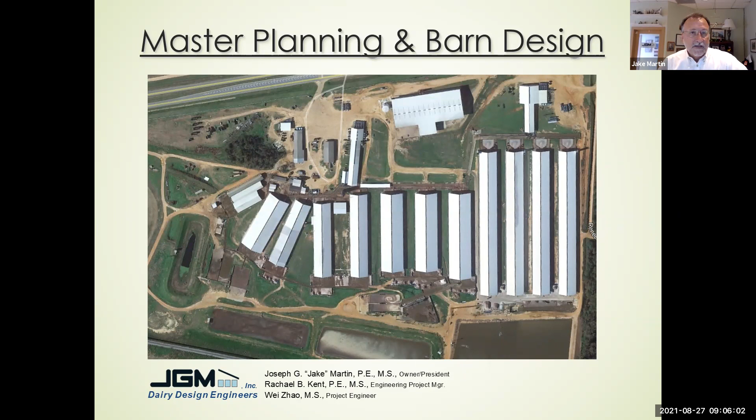What I'd like to do is go through some of the stuff on master planning and total design on these facilities, similar to what Dehne and I worked on for his farm, and then we'll get into some of the barn particulars. We're a little short on time, so I'm going to have to run pretty fast. So if I'm talking too fast and talking like a yank, just tell me to slow down, and I'll do that.

I have some initial thoughts I'd like to share with you, and the guys who know me have heard all this before. My main recommendation is to go out and visit as many successful dairy farms as you can, and if you can't do it locally, go someplace else. I know that COVID's been a pain in the butt, but get out there and visit farms. When Dehne was doing his, he didn't have as many opportunities because there weren't as many farms. Now that he's up and Jay Climo's up and a lot of other guys are up, there are more things for you guys to see out there. So just go out and visit before you decide to do anything.

As we go through these barns, one of the main things we look at is cow comfort. Gordy Jones, a buddy of mine, he travels all over the world as well. And his big thing is milk is absence of stress. We're trying to bring animals into buildings, trying to take the stress away from them, from cooling and from comfort and from shade, and just trying to get them to be happy campers to do what they need to do.

Putting animals in barns, which is what we're going to be talking about, is a different management philosophy, obviously, from what you're doing right now. If you don't agree with this management philosophy, don't even bother. This is a different animal from what you guys are working with right now.

My saying over the years has been, I've seen good facilities fail and I've seen bad ones succeed. Good management, proper management is what it really takes to make one of these things happen. You can spend as much money as you want to on a farm, but if you can't manage it right, it's still going to fail.

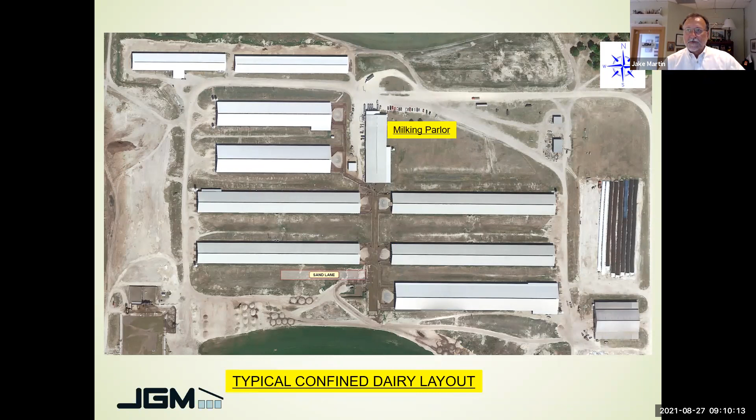Before I get into the Australian models that we've been looking at, I just wanted to take a quick look at this typical barn, this one here in Florida that we did in the last few years. This is a 3,200 cow dairy. This is a milking parlor. These are housing barns for milking cows. This special needs barn with dry cows and maternities and things like that. Older heifers, bred heifers, weaned calves and baby calves.

3,200 cows, 3,000 young stock. You get 7,000 animals when you include dries on this farm, and they're all concentrated in this one little place right here. This is what this guy wanted. This is how he wanted to manage his dairy. In addition to that, we got a feed center, which goes off the chart here. And we got a manure system, which goes off the slide here. But for the farm itself, this is most of the farm other than the property that they have for growing forages.

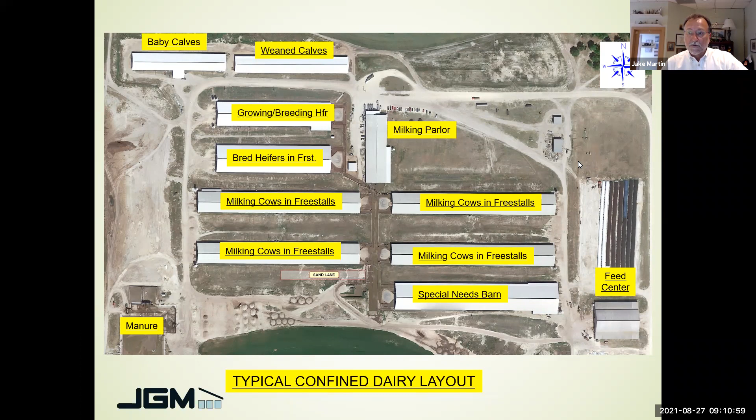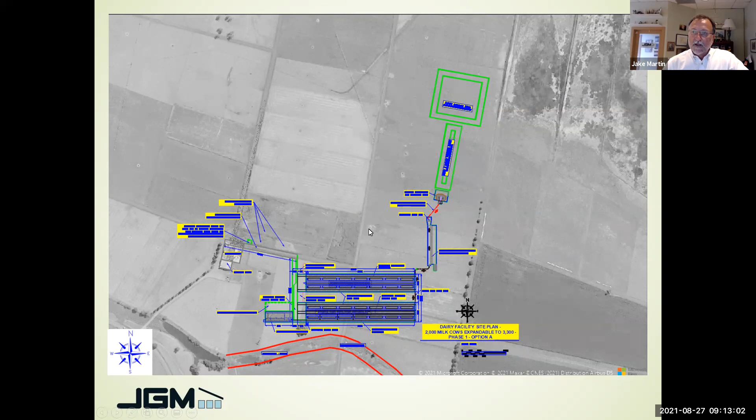As we get further into this and we start saying, okay, this land seems to work, the wind seems to be right, the slopes seem to be right, we can kind of work around these things. How do we phase it later on? He's got 2,000 cows now. This houses 2,000 cows, so he's done, right? He wants to make sure that if 6 months from now or 6 years from now he decides to go further, then we can do that, and he hasn't taken up space where barns would be. So the red is phase 2, and this purple here is phase 3.

And so you're going up to 3,000 milking cows, but in addition, you've got all dry cows. So you've got 1, 2, 3, 4, 5, 6 groups of milking cows here, 6 at 500, you get 3,000 cows, plus all your dry stock, close-up heifers, things like that. A new dairy here at some point in time when this one's out. Phase 1 is the first 2 barns. Phase 2 would be this first freestall, and at that point he's maxed out the existing dairy. And then phase 3, he's got this last barn. Same thing with the manure system that you can continue to add to.

So as you go through it, we've got a plan for the future on this farm. This might take 3 years to come to fruition. It might take 10. But we know where everything is going to be, and we've already figured out where things need to be.

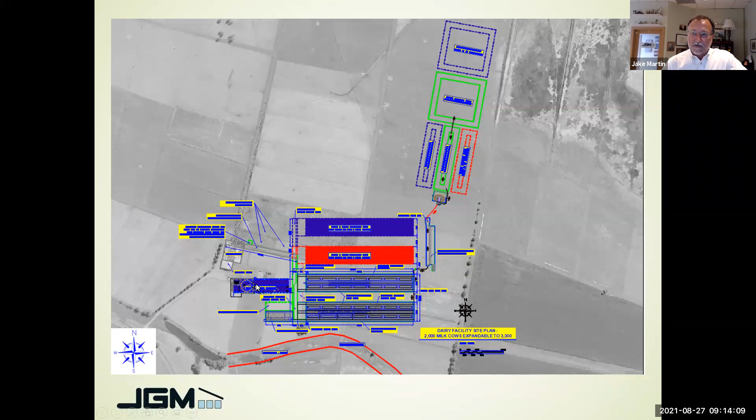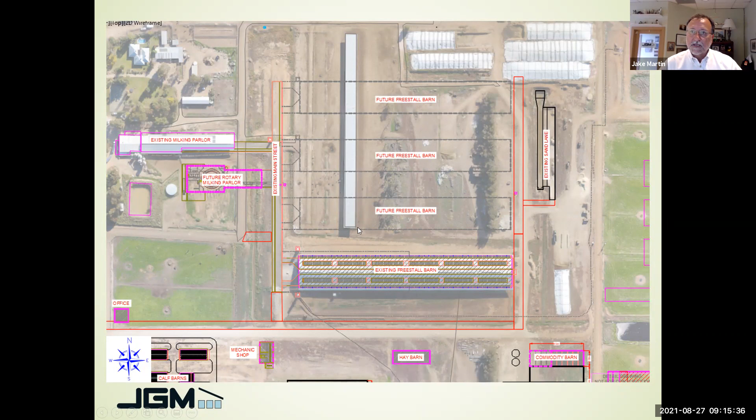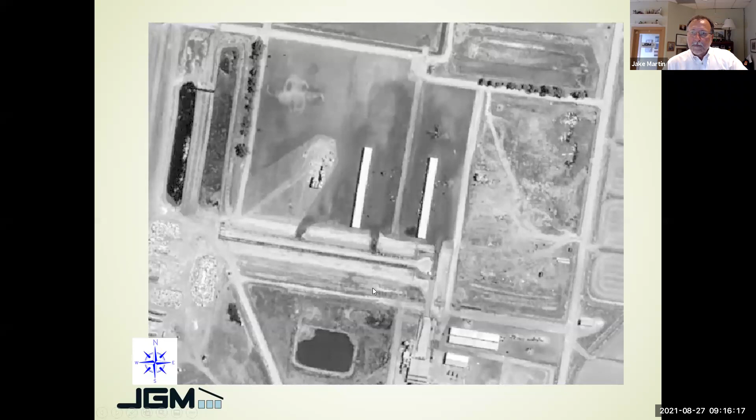Phase 2, which we just finished design on, is to put a freestall barn on top of that feed pad. So now he's got a freestall barn with 1,000 cows on it going into this parlor. He's got a new feed center going in, a new sand lane coming in there that's going to take sand out of here. And then he starts looking at what the next step is, which then goes into 1, 2, or 3 more barns.

But we started with this layout before he did this feed pad. That feed pad actually isn't something that he just threw down there. That feed pad was part of this plan. So these guys knew what they wanted to do over a period of time, and then had us stick stuff in there to make it happen. So again, master plan. It's where everything is supposed to be and where it's going.

This would be the future dairy if it ever got put in. If he did, I think he has enough room for one more barn. Once he gets to barn number 3, he'll have to put another parlor in there.

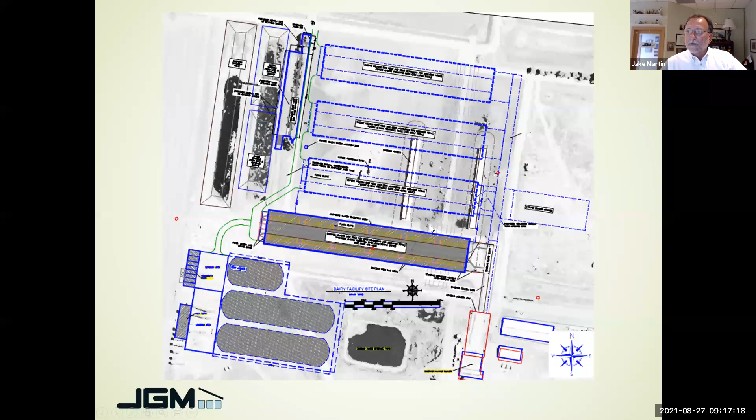This is a facility that we finished the design on. They're trying to get started on construction. This is the dairy right here. All the tracks going back and forth to grazing pastures that you guys are all familiar with, manure storage ponds. Again, this is trying to go to a 2,000 expandable to 3,000 cows. These are 1,000 cow barns right in here.

And in reality, this plan looks just like this if you were going to milk 1,500 cows as opposed to 3,000; the barns get shorter. But the general idea is still the same, is to look at what's going to happen on all of these buildings, where each of them are going to go, and where this thing is going to end up. And that's what this is right here.

So again, a sand lane because it's sand bedded freestalls, screen separator, solid storage ponds here, settling basins, and a wastewater storage pond here. So again, he knows what's going to come down the pike. He's not going to build anything here. He's not going to build anything here, leaving himself open.

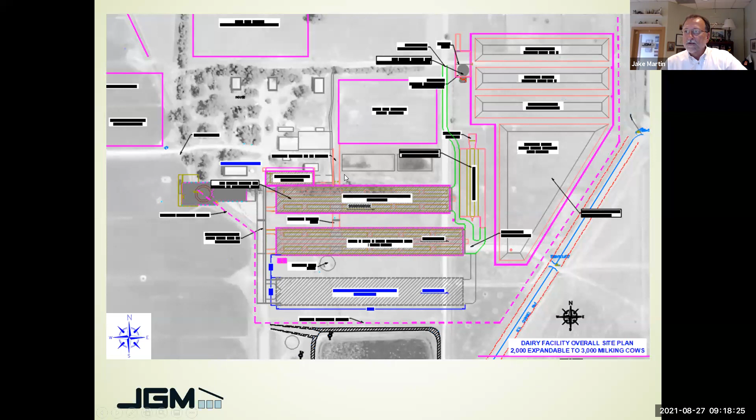This is Deane's facility, when he and his dad first got started and brought us on board to look at some things. There's a dairy right there, open holding pen back here. He's got some wastewater storage in these ponds right in there, and then he's got grazing pastures up in this direction down over here. So they wanted us to go back in and look at how to expand this facility.

So this is Deane's current barn. It's a 750 cow barn. It's got a nice hospital area in the front, right up in here for hospital cows as well as maternities. We've got a walkway in here, continuing to use this existing dairy. We've got room for more barns here. So again, whether they come in or not, Deane's going to make that decision in the near future. But we've got room for it, and we know where not to build things.

Same thing with the dairy, the future dairy. This will be a travel lane right over in here. The manure system was set up to where it was scalable, so you could put in what he needed for today, and then you could add later on. So that's all there.

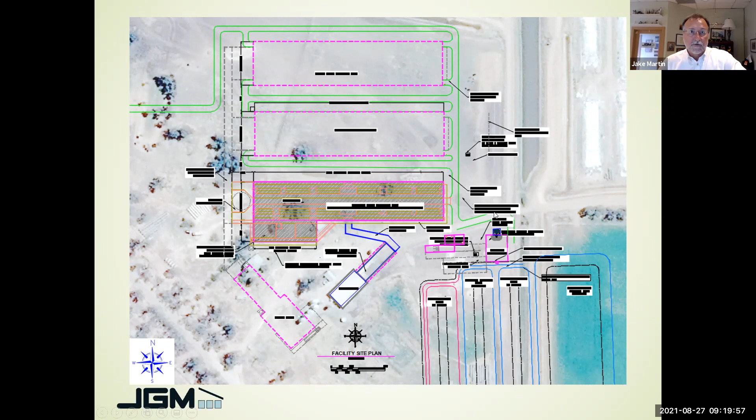Manure system is a little bit different here. This is not a sand bedded barn. This is going to be a manure solids green bedding type system. So he's got a little bit of a difference. He's generating and making his own green bedding and putting it back into the barn, which is cool. So that whole system is set up to be expandable to work for the ultimate size of this facility.

So that's just giving some ideas about some of the projects that we've worked on. These are recent projects, things that we've just been finishing up in Australia. A few notes on master planning before we bump over to barns. Each of the barns that you guys are looking at have got to be based on the climate that you're in. So most of the stuff.

Just a quick question, Jake. You talked about numbers there. Are there minimum numbers that you look at with these sort of facilities? Just before you go on to the next point.

What do you mean, minimum numbers to start with? Minimum numbers to go to? I guess you're looking at 1,000 cow barns there. Are there barn sizes? Can you change barn sizes accordingly? These barns just so happen to be the ones that we were looking at were 1,000 cows. Those are 500 cow groups or so. But yeah, you can look at 300 cow groups, 400 cow groups, 500 cow groups, 200 cow groups.

I mean, one of the things that you look at on these barns, and I'll get into this in a minute, would be group sizes and what your parlor capacity is. Right now, a lot of guys in Australia just milk the entire mob all at one time. And then cows are in a holding pen as long as they're in there, so hour and a half, 2 hours, 3 hours, whatever. Once you get into barns, you can't afford to do that.

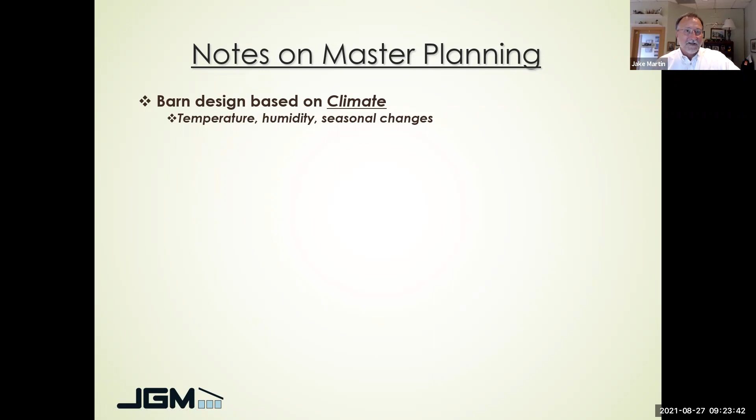So most of the barns that we're in here are in northern Vic, southern New South Wales, similar climates. Once you get into the coastal areas, it's going to be different. It's going to be higher rainfall, higher humidity, closer to the coast. If you get out to Perth, it's a little bit different. If you're going up into northern Australia, you're getting into different climates. So the main thing is you've got to take a look at what's going on with climate before you just jump into a barn. Wow, man, Dean did it, I can go do it over here. But that's not necessarily the case.

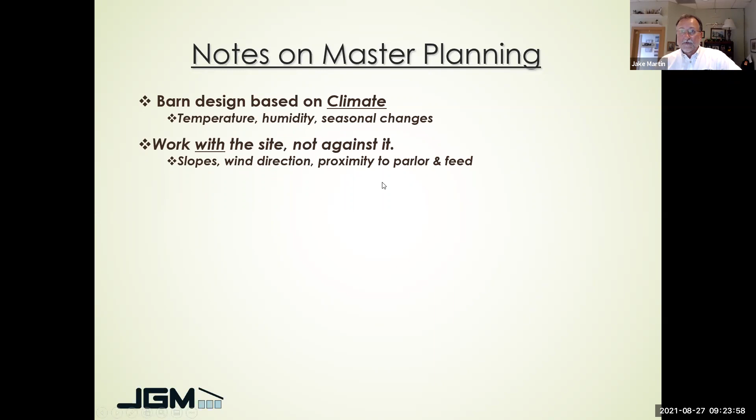Working with a site is important if you can. A lot of stuff that we've been doing has been on really flat sites, so we have to make all of our slopes, but as much as possible, working with wind directions and barn slopes and proximity to parlors and feed and things like that is important.

Future-proofing the farms, which we showed in each of those little examples I just went through. The old adage we go by: the three sure things in life are death, taxes, and dairies expand, because it just seems like dairies always get bigger. No matter how big they are, they seem to get bigger. In this case, do we leave enough room to double or triple in size? We've just got to leave enough room, look into your crystal ball and make sure that you've got enough room to do something in the future.

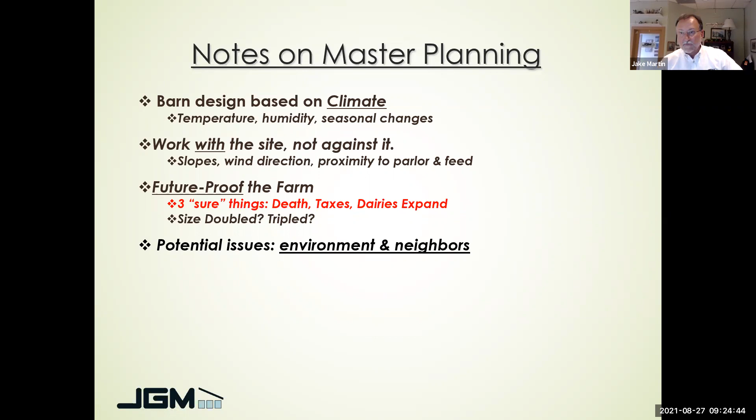This is coming up more than anything else in these last few projects that we've worked on as potential problems or issues with environment and neighbors. People think of dairies in Australia and New Zealand, and they think of these black and whites and this beautiful green grass. You start putting cows in barns and things can change. That doesn't mean they're going to, but that does mean that some people take a negative effect on it.

And it only takes one person in your area. Trust me, we know. It only takes one guy in your area to screw this whole thing up. So you've just got to be careful. That doesn't mean you don't do it, but it does mean that you've got to be careful on how you're working it out. People smell with their eyes. It sounds stupid, but if something looks like it's supposed to stink, it's going to stink.

And some people get that when they start looking at larger waste storage ponds and looking at barns and looking at cows being concentrated. So we just got to be careful and do a better job. I think as an industry, you guys need to make sure you're doing a better job at saying, hey, these cows are happy and these barns are good. You need to get professional help.

There are guys out there right now in Australia who are damn good at what they do that can help you with working on these environmental permits and nutrient management plans. You've got to make sure you're getting these guys involved and they understand what it takes to get things through council, as well as to help with neighbors and things like that. Don't underestimate this. In fact, I think in some ways this might be the first step.

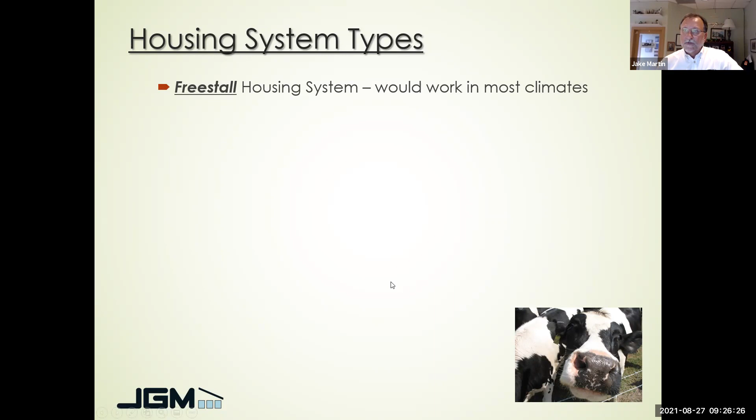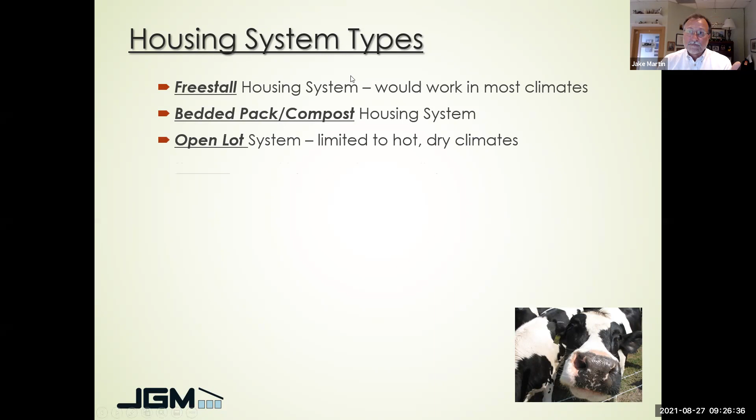Okay, let's get into the housing barn types. I'm covering a lot of ground in a short period of time. Sorry. For the most part, we're looking at freestalls, bedded pack, compost barns, open lot systems, and pasture-based systems. I'm sure as hell not going to talk about pasture-based systems because I don't know anything about it. You guys do. Open lot systems, there's 2 that I know of that we've worked with in Australia, and it's very limited to certain places in Australia. So I'm not gonna touch on those right now. We'll concentrate on freestalls and bedded pack.

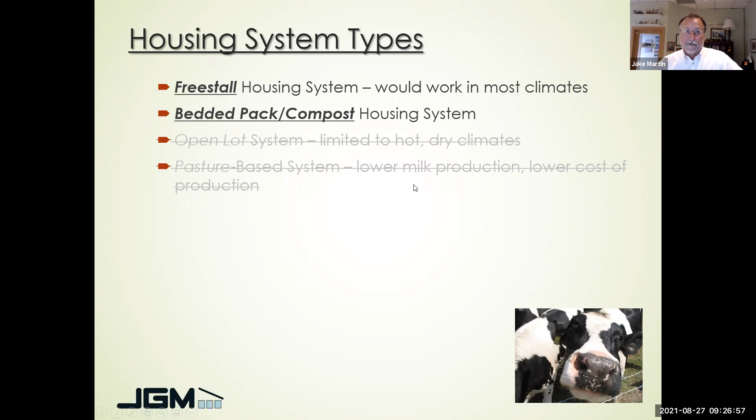Freestall barn: when I got involved with Dehne in the project from the very beginning, I start asking questions about how many cows you're milking and what your group sizes are, what I just mentioned, right? We're trying to keep it down so the cows aren't away from the parlor any longer than they have to be. You spend a lot of money on this building. You'd like them to use it. Again, with my little example about cow throughput, cows per hour and size of groups, those are things that we can work with as you go through the system.

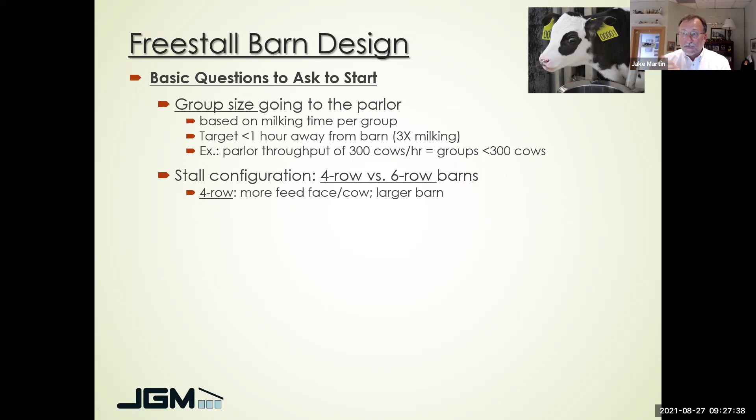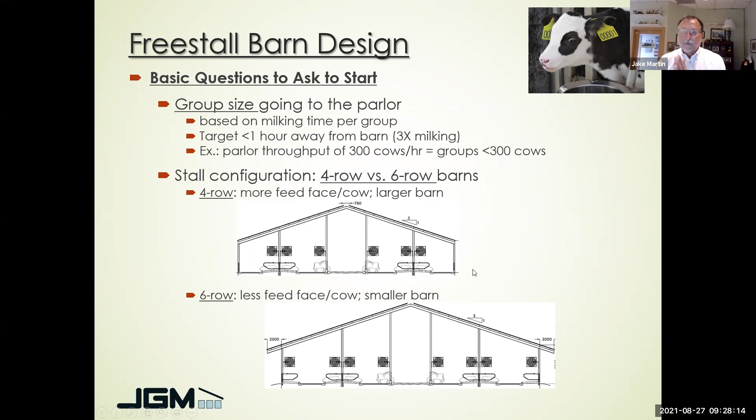So that's the terminology that we use, and that's how you usually break up the system. Say, I want to put a freestall barn in. Do you want 4 or 6-row barns? We'll talk about whys in a second. Other basic freestall design questions that we go into is access for cows to the outside. We go into this a number of times. Guys were asking about putting cattle on the outside of their barns, or should we have access to the outside of the barn? Some of our processors require us to.

The last time I did this in Australia was in 1995, for Quentin's dad, Paul Moxie, and for Ron Parrish. Since then, for the most part of these freestall barns, we haven't done this. You get muddy lots, you get dirty lots, you get cows going outside, all the hoo-ha that goes along with that. If you leave gates open, cows like to go outside better than they like to go inside.

We screwed the barn up. We need to get this barn correct. We need to have water, we need feed, it's got to be a Hyatt Regency, man. We just want these cows to be happy. But for the most part, guys are not doing that. And it increases the size of the facility, the spacing between the barns and things.

In a lot of ways, it's more about people than animals, and you might not agree with me and tell me to go jump, but that's the way I've seen it.

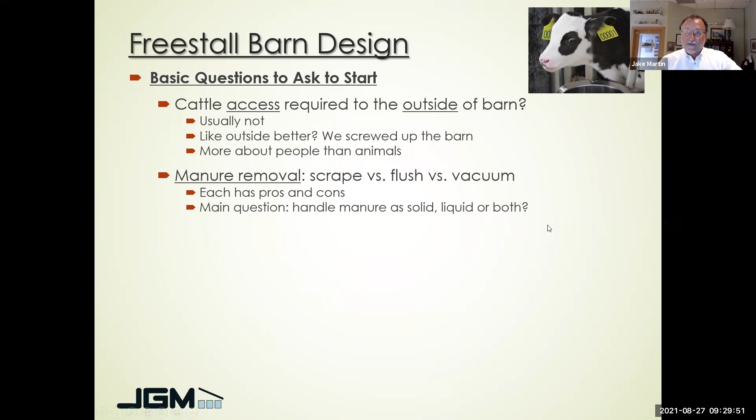The difference with barns like this right now: if you're grazing cattle and you're not using a feed pad, you're only collecting about 10 or 12% of the manure that you produce on a daily basis. When you get into a freestall barn type application, you get 100% of the manure that you're producing. So right off the bat, you've got an 8-fold factor of manure that you're collecting.

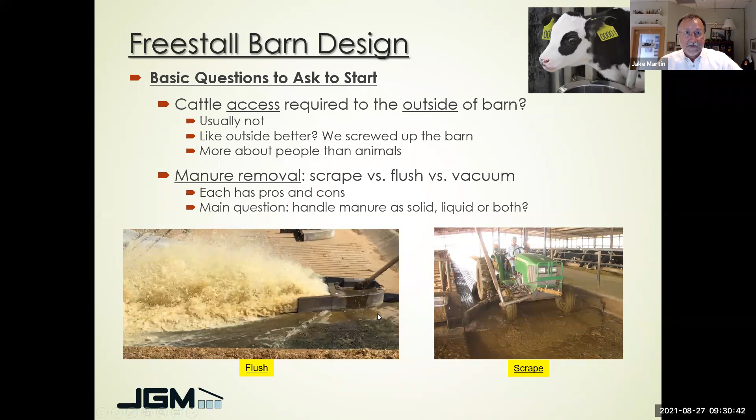In addition to that, if you're putting them in these barns and feeding them more and they're producing more, they're going to produce more manure, which means that now you're going to go to 10 or 12 times the amount of manure. So you think you've got a problem with wastewater and manure right now, this is going to change things. That's not a bad thing. It's just a thing.

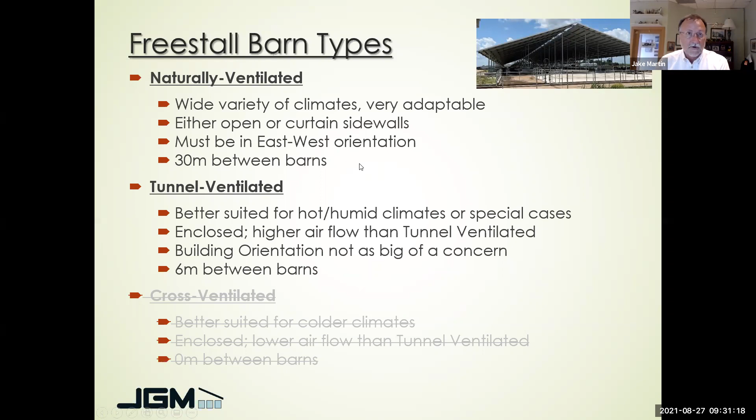So once we get an idea of the initial thought processes on a freestall barn, we start looking at how we're going to ventilate them. Natural ventilation, tunnel ventilation, cross ventilation. Right off the bat, in Australia, I haven't seen any place that cross ventilation seems to make sense to me, at least yet. So natural ventilation and tunnel ventilation is sort of what we're going to. We're not going to go into all the words right now. You'll get a copy of this to be able to play with.

A tunnel ventilated barn is just that. It's a tunnel where there's side walls, there's end walls, a relatively low roof, and air is sucked in one end of the barn and blown out the other. A naturally ventilated barn still has fans, but the barn is open on the sides, open at the top. That's our terminology. We use these barns throughout the world. Projects we've done: USA, Turkey, Spain, China, Australia, we can name a bunch more. So these same similar barns we're doing everywhere.

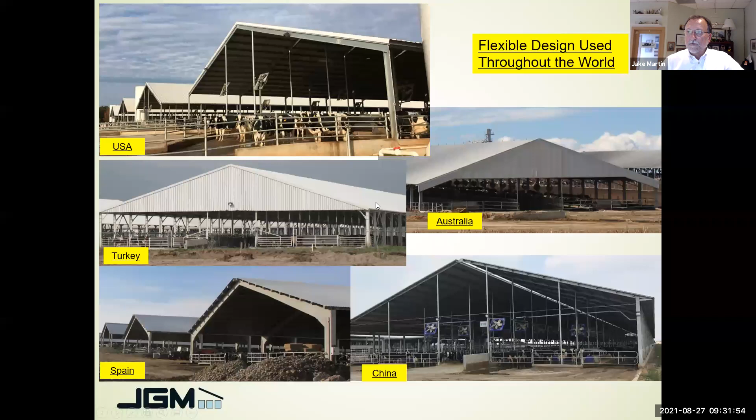This is especially important if you're using headlocks to do your herd management. So if you get cattle in there and you want to do vaccinations, you want to do preg checks, all the horrible things you guys do to cows, you can have it done right there at your feed face. The 6-row barn's too short, and so you can't get all the cows in it at one time. So then that creates its own set of problems. So yeah, if you're not going to be managing cattle inside the barn, it may not matter.

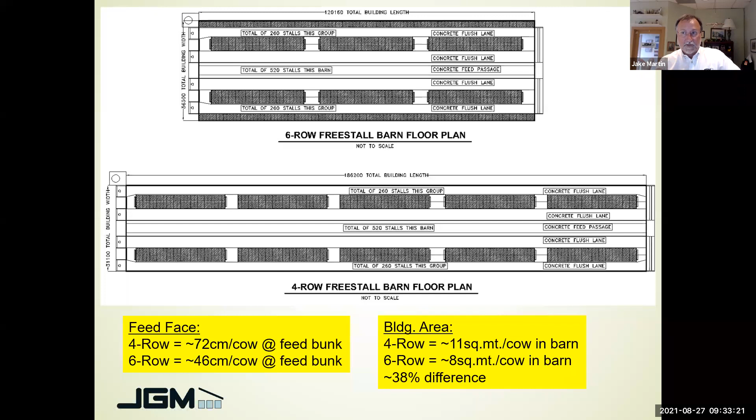In a 4-row arrangement, we're talking 10 or 11 square meters per cow in the barn; 6 rows, 8. That 6-row barn's 38% smaller than a 4-row barn. So in the US, the factor is about 20% difference in the cost of building. So a 6-row barn in the US is about 20% less expensive. A lot of guys are going that direction, A, because they want to manage cows in the parlor, B, because they can get more of their money to do other things with other than build barns. There's pros and cons to each.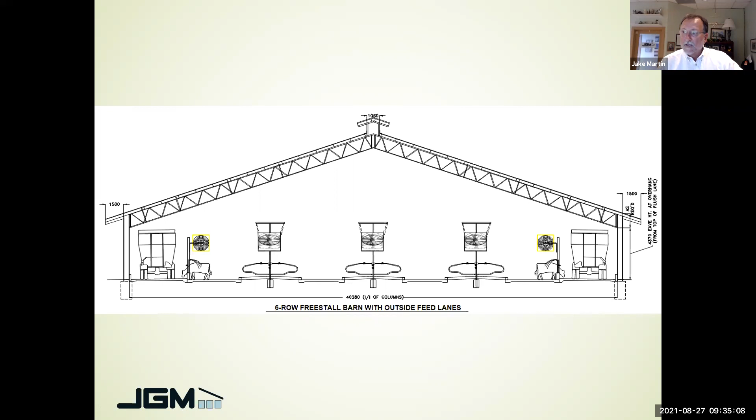Some of the guys with the bigger farms, they have bigger wagons, so they'll go 35 or 40 cubic meter boxes in there. These things get quite high, so 4.5 meters. So you've got to make sure that you're staying the hell out of the way with this thing. So, something to consider as you go along the lines of this building.

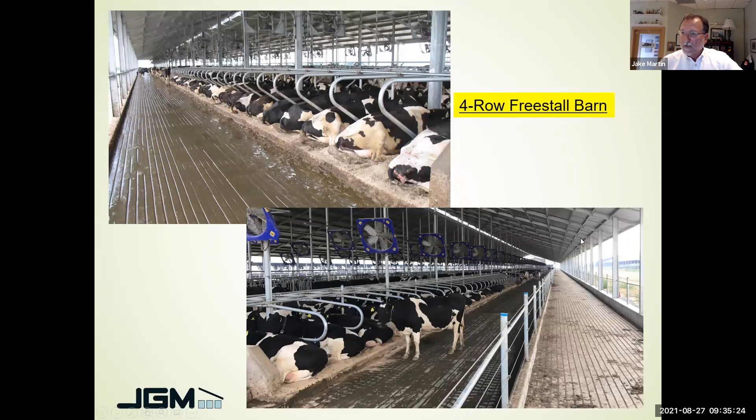So for naturally ventilated barns that we were just talking about, the things that we look at, again, you'll be able to look at this on a handout. 3-to-1 roof slope, which is 33%, which is 18 degrees. Not any flatter than that. There are some manufacturers in Australia right now that are selling curved roofs. Knock yourself out if you want to go that way. Don't pay any more for it. It's a shade. It's on top of the cows. So if it costs the same as the other barns, great. If it's not, it's a different calculus.

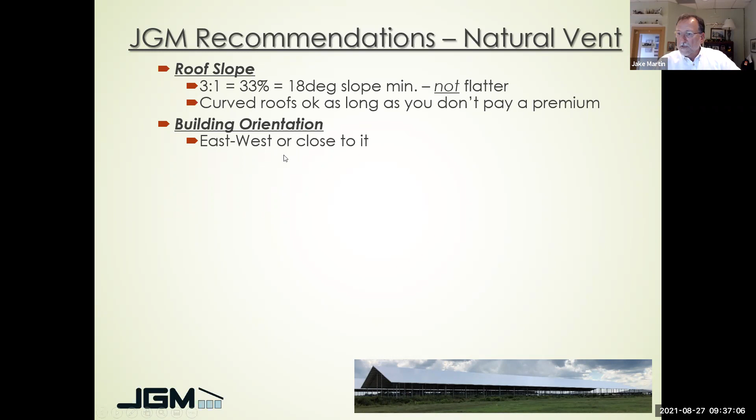Building orientation, east and west. If you look at Dean's barns, they're east and west. We try to make sure from a shade angle standpoint; it really screws you up to go anything outside of that with a naturally ventilated barn. Continuous open ridge vent, sized correctly, potentially put a cap on top of it. Eave heights vary on these barns, to make sure that you got them right.

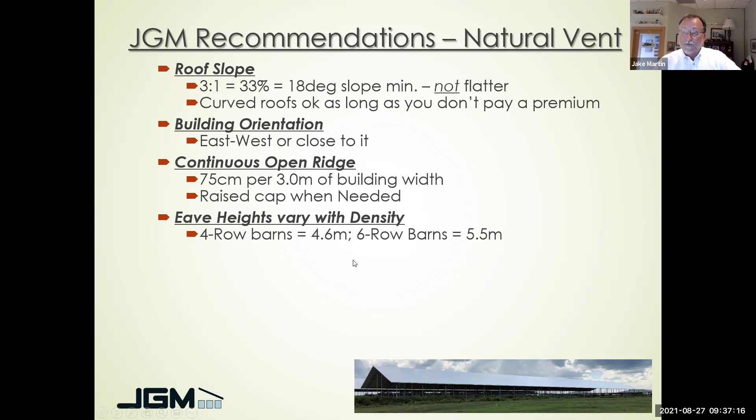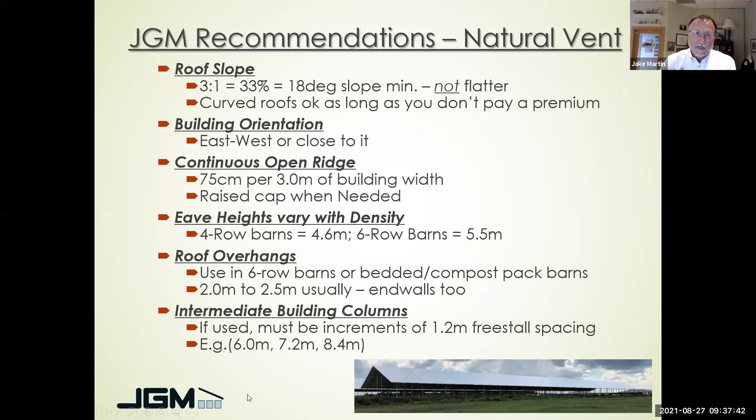The 6-row barns need to be taller than the 4-row barns because there's a higher concentration of cows on the inside. Roof overhangs, we've got to make sure that we put those in accordingly, because the 6-row barns have stalls on the outside that could get blowing rain, a little bit of sun going into it, so you've got to be careful with that part, and you just got to make sure you have enough roof on the outside of that. And then intermediate building columns, which for the most part in Australia don't happen.

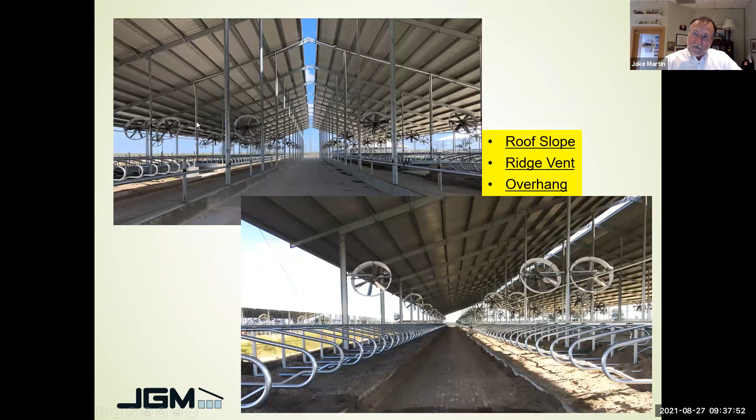So this again is a building with an open ridge on it and this overhang. So this has got overhangs here. This is the sidewall overhang to protect these outside freestalls. This is one of those truss frame buildings in Australia with an open ridge. This open ridge, you can see, it's got a direct shot of light going across these cows right in here. Sometimes it can potentially create a problem.

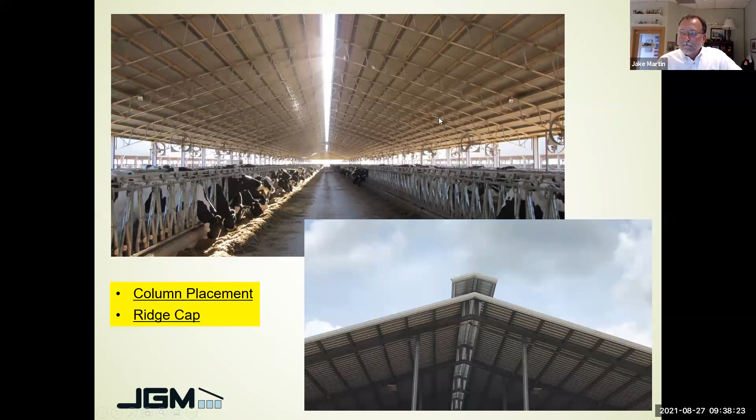And lately we've gone back through here and put ridge caps on these buildings. That does two things. It keeps a little bit of drift of rain out of there, and it also stops the sun from beating on these cows' faces. Some guys find it a problem, some people don't.

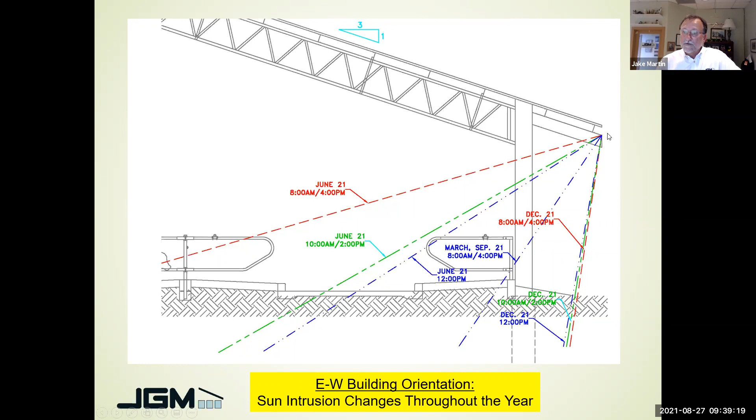And then followed by winter time, you'll get a little bit more sun in, but it doesn't really matter at that point because it's cooler. We do these shade studies on every building that we do just to make sure that we've got this correct right in here. But that's something that you need to consider as you put these buildings up.

I'll go through some of the tunnel barns. There's not very many right now in Australia. Quentin's got most of them, so it's something we can look at. The tunnel barns are a bit different because these barns are closer together. These are only 6 meters apart.

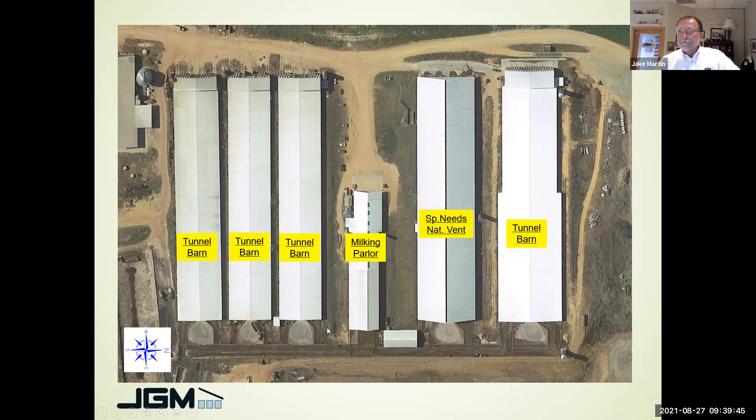This happens to be a naturally ventilated barn in the middle of it, but that's a tunnel barn. These are all tunnel barns. You can see all the fans at the end walls of these buildings here. This is a complete tunnel barn facility. This is in China.

So barns are lower. The eave height is lower, the roof slope is lower. This is not an open ridge. It's just a ridge light, just a clear cap on it to let sun in, with fans on the end. Again, the tunnel barn is going to let air in one end and back out the other.

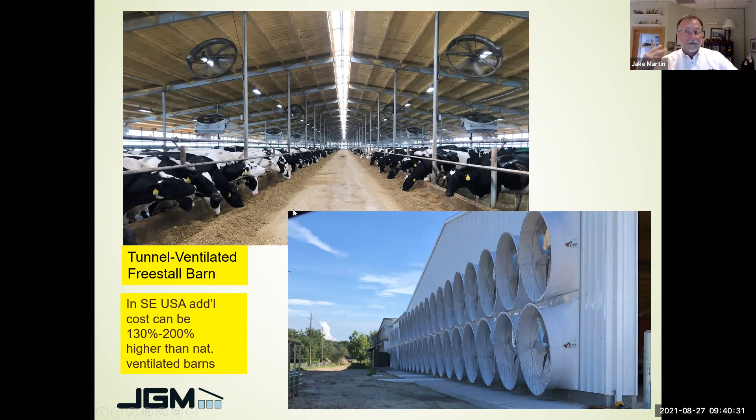For the most part, these are going to be pretty expensive in the U.S. and in my part of the world, in the southeastern U.S. We're talking about anywhere from 130 to 200% cost of a naturally ventilated barn. That could be because of insulation, because of walls, because of 110 different things. Why would anybody do this?

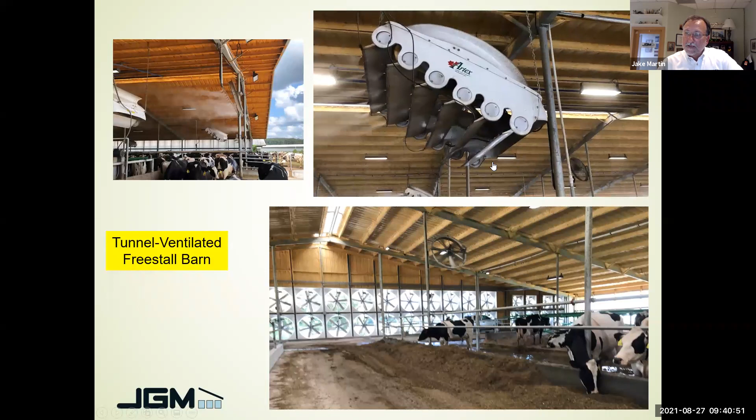This is North Florida Holsteins in northern Florida. This is a high pressure misting system that's inside this building. This building is a 1,000 cow barn, two 500 cow groups, average 54 liters of milk per cow. That's 54,000 liters a day coming out of this building. So this is not a 35 liter herd.

This is all his fresh cows. This is a 6,000 cow dairy, but he's got fresh cows in here. He's got 1/6 of his herd in this building, but this is where all of his high producing animals are. And he's got a very expensive cooling system in there in order to combat that. So are there situations for tunnel ventilated buildings? Yeah.

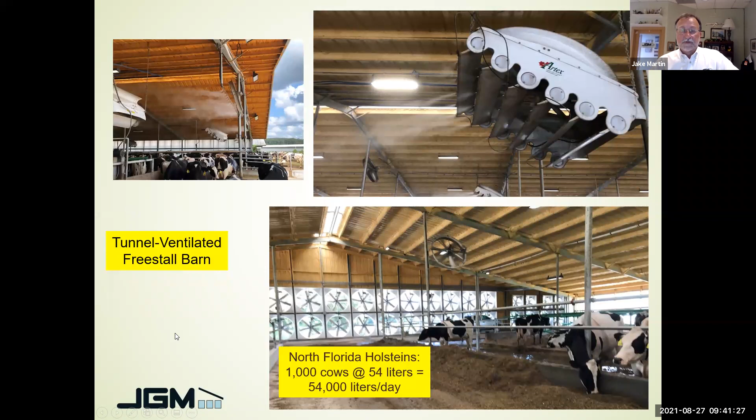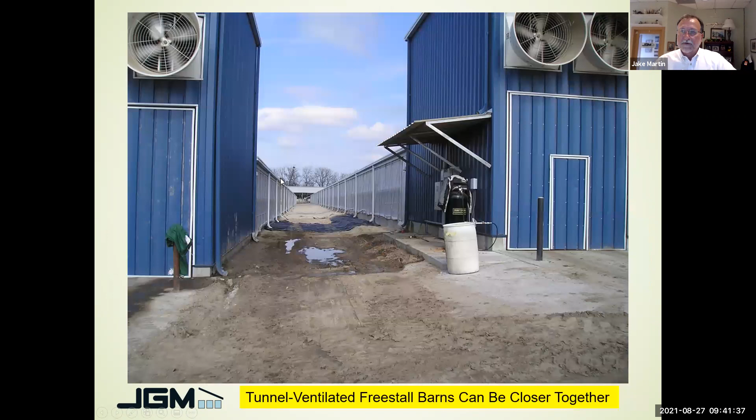But it's something that you can take a look at. Again, these barns are a little bit closer together, and instead of 30 meters or 25 meters apart, they're only 6. So that's freestall barns. That's tunnel ventilated barns, those two different types of freestalls. This with a covered feed face was basically just a covered feed pad.

And the only point that I wanted to make here, if this is a feed pad, you guys all know how to build these things and how to lay them out. The big thing about these feed pads, if you're gonna put a barn over them in the future, or maybe you're gonna cover them first, just keep in mind that you could put a freestall barn on top of here. I've seen a lot of guys in Australia that are putting these feed pads in north and south.

And when you try to cover this thing and put a barn on top of that, it's oriented wrong. So now you're gonna have shade that's going to come in. There's going to be some really funky things that are going to happen inside there. Not insurmountable, but if you're thinking about putting a freestall later on, you need to be thinking about how to put these feed pads in here.

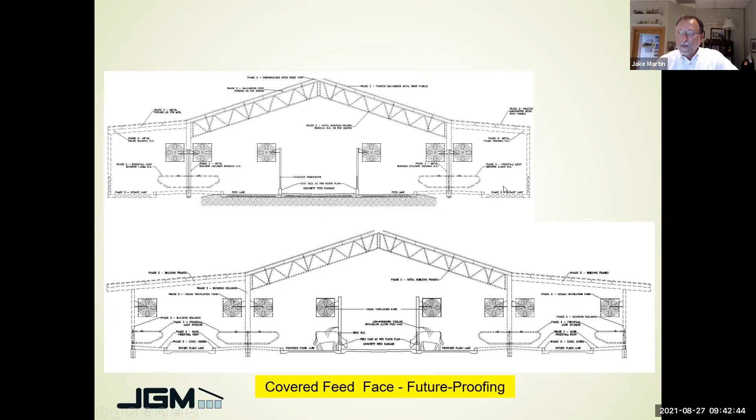If you're going to cover a feed pad, you need to make sure that you got something in here for future buildings. This is a future 4-row, future 6-row with a covered feed pad. This is my little don't paint yourself into a corner thingy.

These are two that we did here in Florida and in the southeastern U.S. You can see that they've got high roof heights on them, mainly because we're trying to accommodate future freestalls at a later date. This guy here never built the freestalls onto it. We did this about 10 years ago.

This guy was done about the same time, and then 3 years later, he ended up putting freestalls on the outside. So right now, if you go to this barn, it's got a 6-row freestall barn.

Bedded compost pack housing barns that we've been looking at. One thing that I've heard a lot about in Australia is that there's a generic term of compost barn in Australia, with a lot of guys talking about it. A compost barn and a bedded pack barn are two different things. A true compost barn is an aerobic system.

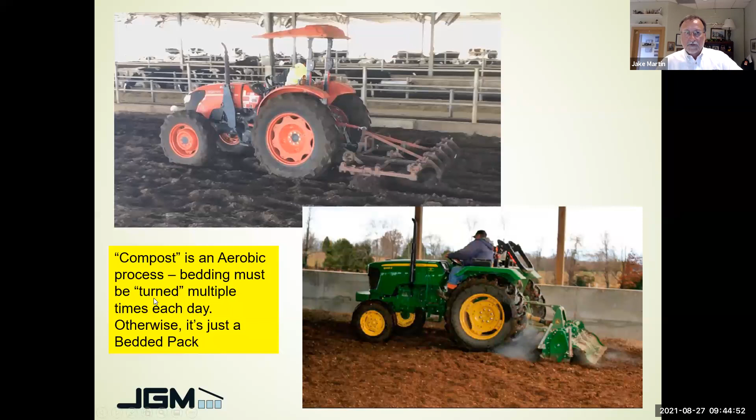So the compost barns are indeed going to be tilled, or chisel plowed, multiple times a day, every day, in order to get this thing to work out right. But you're basically making compost. One of the things about this compost document was that it specifically called out wood sawdust. You could use wood shavings as well, but it's not quite as good.

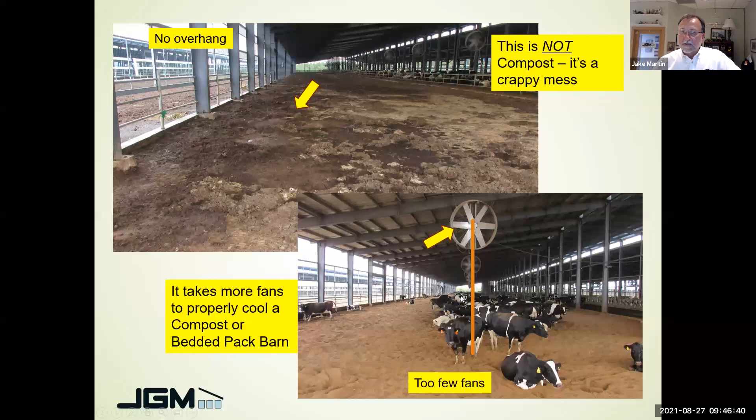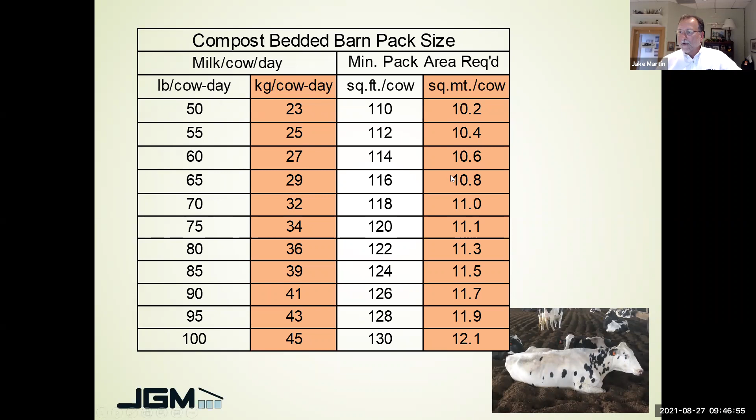I'm not going to go into this. This is compost size, minimum pack size based on milk production. A lot of guys are going to be in the 10, 12, 14 square meters per cow inside these packs. If you want to get into that, you can. We can talk about it at some point.

These are bedding volume calculations. Again, I don't want to get into that, only from the standpoint, and we'll go over it in a second with free stalls, that there's a huge amount of bedding, and Dean found this out, required to start up a barn. You got a barn, you finished it, you paid the contractor, now you're gonna put cows in it. You got a snotload of bedding to put in here.

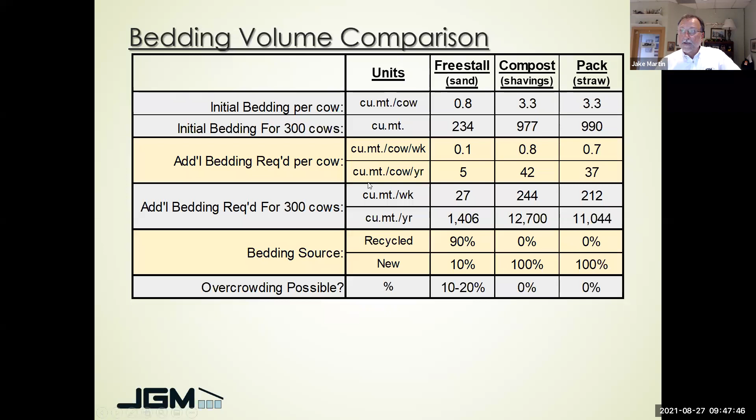A 300 cow group in a bedded pack building, that's almost 1,000 cubic meters of bedding just to start the barn, no cows in it. And then you got to put bedding on top of that in order to get it to operate. So you got to be aware of how much bedding goes into these barns, no matter what type of system you have. Again, this is too dense to go into right now, but it's on the sheet.

How we doing time-wise, Mikey?

So freestall management considerations, I wanted to throw a few of these things up there. Again, this is kind of a dense thing. The main thing is this is in a sand bedded freestall barn. In a 300 bed facility with empty beds like this barn in the photograph I'm showing right now, there's 300 beds that need sand. That's 400 tons of sand just to put the initial sand load into one half of this barn. It's a 600 cow barn, so that'd be 800 tons of sand to go into the building before you put a cow in there.

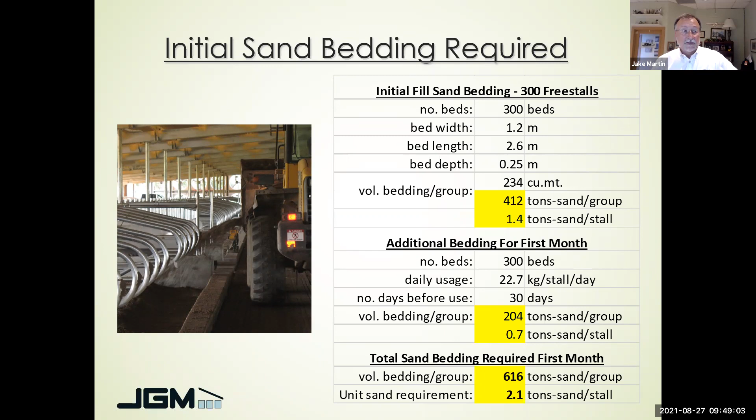And in a barn where you're recycling sand, and let's give it 30 days of recycle, that's an additional 200 tons of sand you have to have available per side. So 400 plus 200 is 600 tons of sand. If you have a 600 cow barn, that's 1,200 tons of sand that you'd have to have on hand in the facility, ready to go before you have cows in the barn. It's something to keep in mind as you start looking at these facilities.

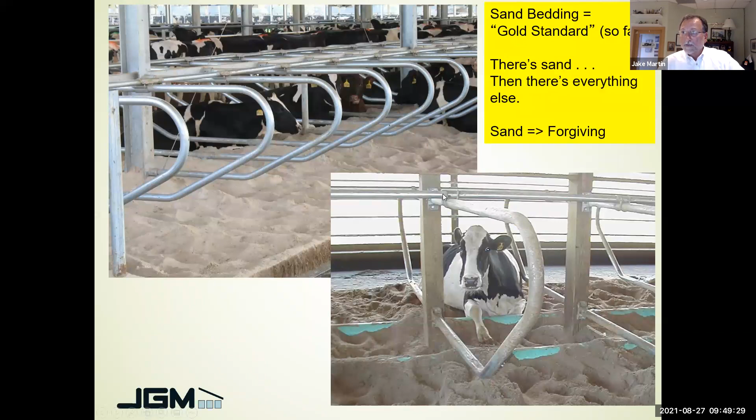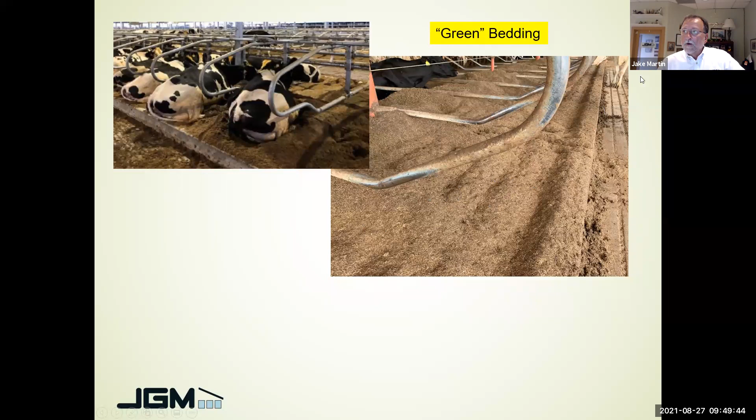We like to say sand is king because sand's the gold standard. It's not the only bedding. A lot of guys like it because it's pretty forgiving from a moisture standpoint. It's hard to deal with, and it plays havoc on your manure system, but a lot of guys do use it. Green bedding is what Dean has in his new facility here. It can work quite well. Everything at Kumbuna is now green bedding in the freestalls. If managed correctly, it can be a very good bedding source. We've seen around the world that this can work pretty well.

You got to make it first. As I mentioned in those last few slides, you got to have enough bedding to put into the freestalls, to put cows in there to produce the manure in order to get stuff in there. And if you're going to continue to put bedding in these barns, you have to have additional bedding in order to make this happen.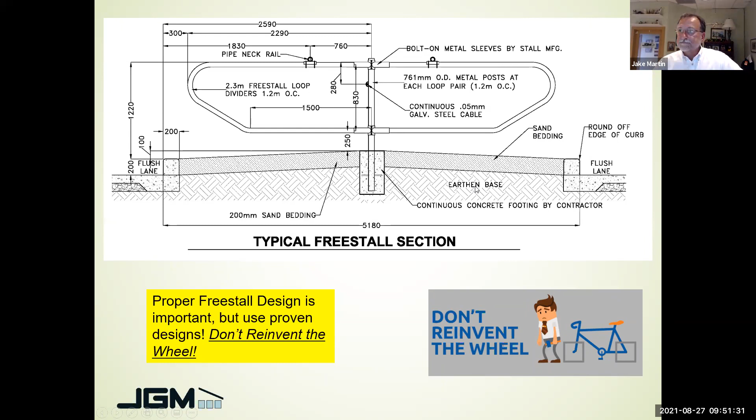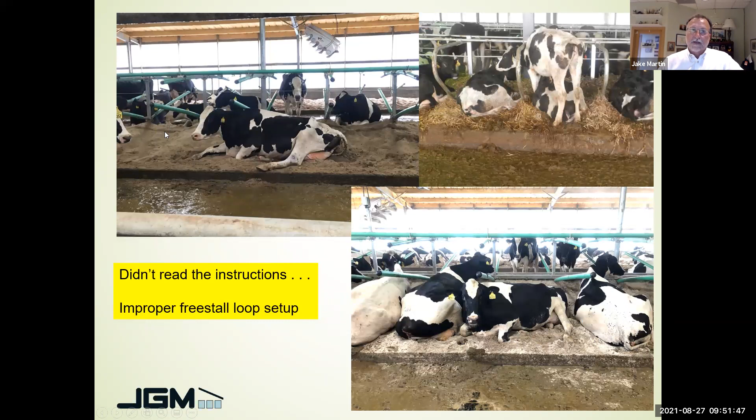You can screw up freestalls pretty well. These girls didn't read the instructions on their stalls. These are green freestalls that we had here in Florida that weren't installed properly. So that really made a mess till they got them installed correctly, but cows didn't understand how to use them.

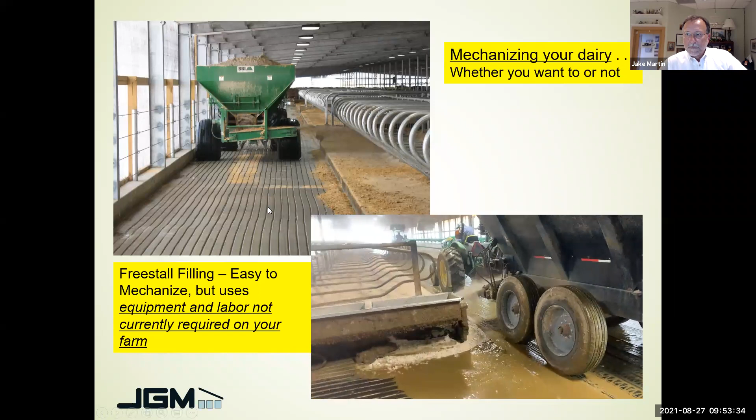Biggest thing, if you guys don't have barns now, you don't have this equipment. This is the kind of stuff that you can do that's gonna save you a lot of time, and it ain't cheap. So all of these pieces of equipment in here, they tie up a tractor, and they're expensive to purchase. But if you've got 300 or 400 or 1,000 freestalls, you can't do it by hand. You have to do it with some piece of equipment.

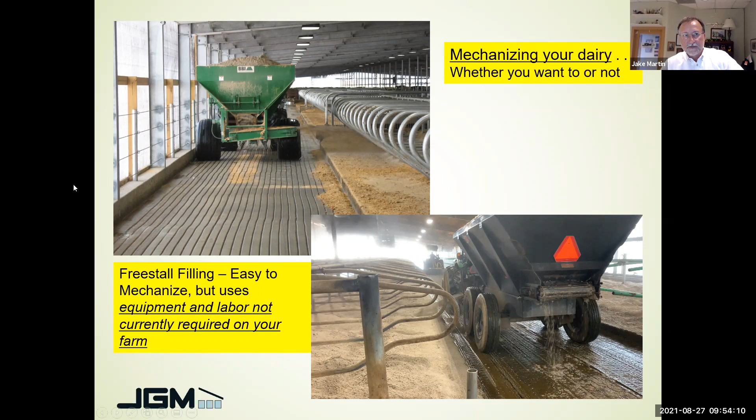And so it's just one more thing. It's just the mechanization. That's what I've called mechanization in the dairy. You got to have that in order to get a freestall and to make this work. And if you're worried about equipment, you're worried about the cost of it, then it's probably good that you don't mess with these barns. These rakes that are coming up, Dean and I were talking about these rakes a while ago, different types of them that are out there.

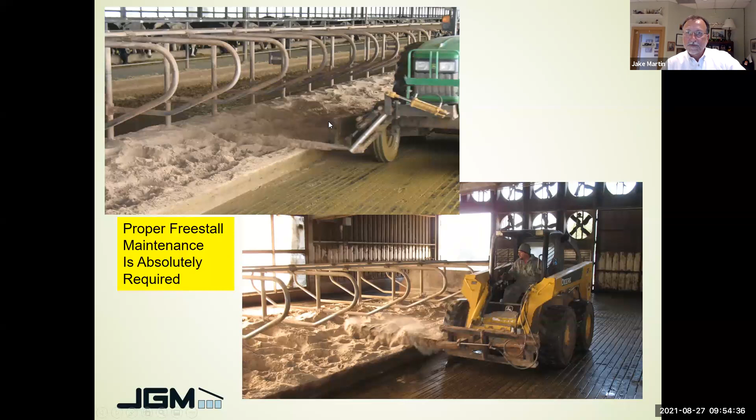This happens to be sand beds. But going through there with a piece of equipment and being able to groom these beds is a big deal. A lot of guys go back and forth about whether they need to groom the beds or not, but especially if you're using green bedding, it's nice to be able to kick the stuff around a little bit and help dry it out. Same thing with sand. You try to get it dried out as best you can.

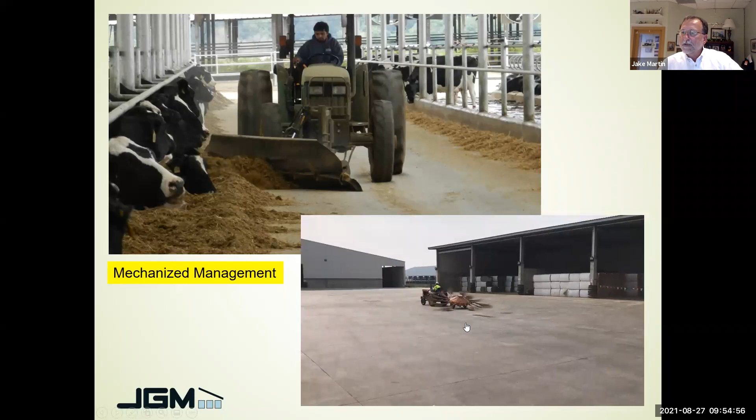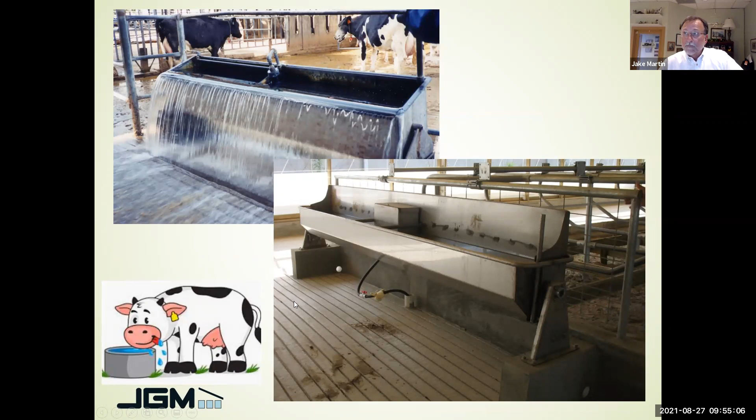So mechanization for sure. Water troughs, the way that we lay things out and making sure that we got enough water in all these facilities. We're talking about in the neighborhood of 10 centimeters per cow, 200 cows would be 20 meters. We try to get as much water as we can.

These tipping water troughs are kind of interesting so that they can clean these crossovers, which is good. You don't have to get up there with a brush quite as often because you can dump the water trough, clean the crossover, and then keep the water fresh. So there's a lot of good things about them.

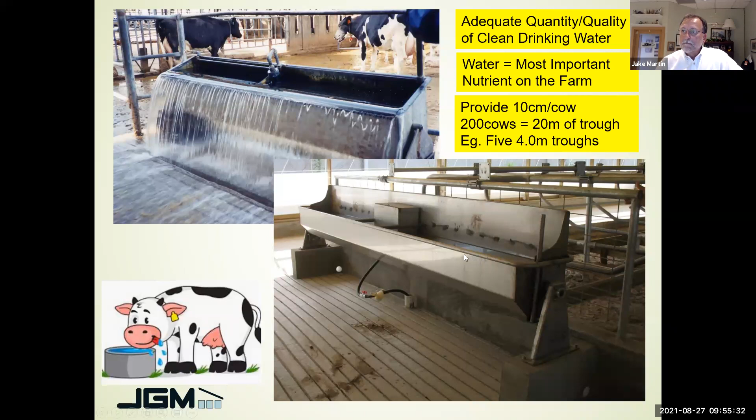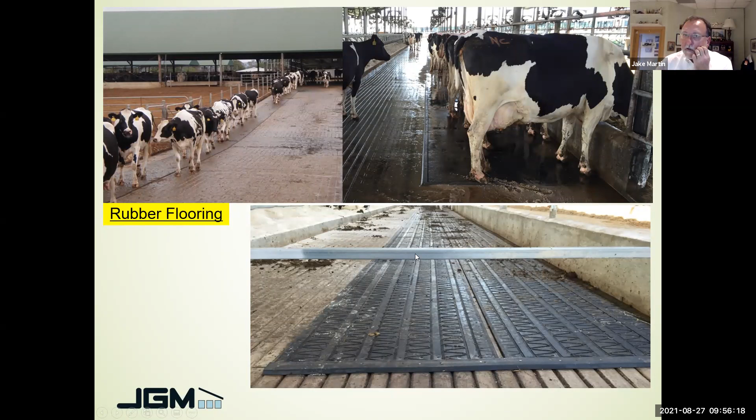This is a feed face rubber strip right here. Same thing in here. These are grooved rubber so that they keep a cow's feet from slipping. These are installation priorities; I'm not going to go into them right now. Main thing about these rubber mats is steel blades on pieces of equipment are a big no-no. The second thing is that you get some guys with skid steers that start hot dogging these pieces of equipment on these rubber mats, and they'll tear them off the floor. So things to consider once you start putting these rubber mats on floors.

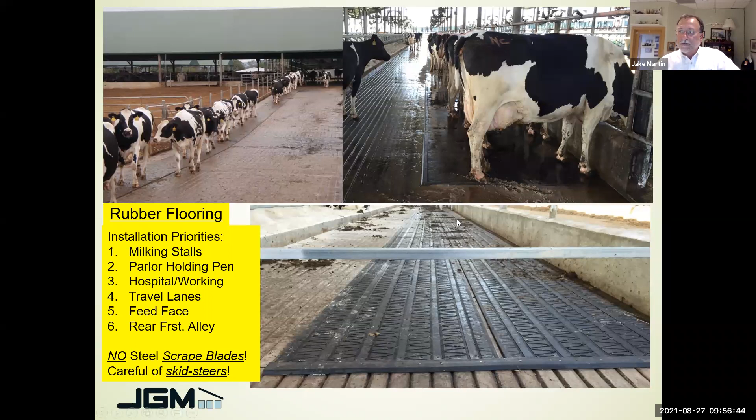We're almost finished. So this is grooving floors. There's wet groove, dry groove. There's more art than science sometimes in these wet grooves. And you got to understand and know what you're doing in order to do this right. If you do it right, these are really good floors. And you can tell the guy who's doing this knows what the heck he's doing. This is a machine groove type system. These grooves also look pretty good.

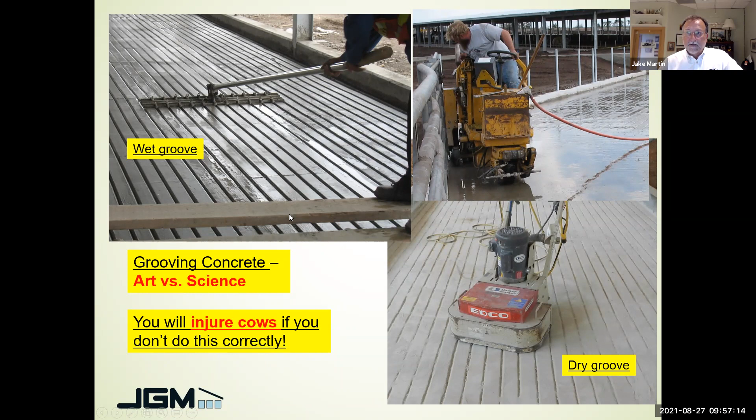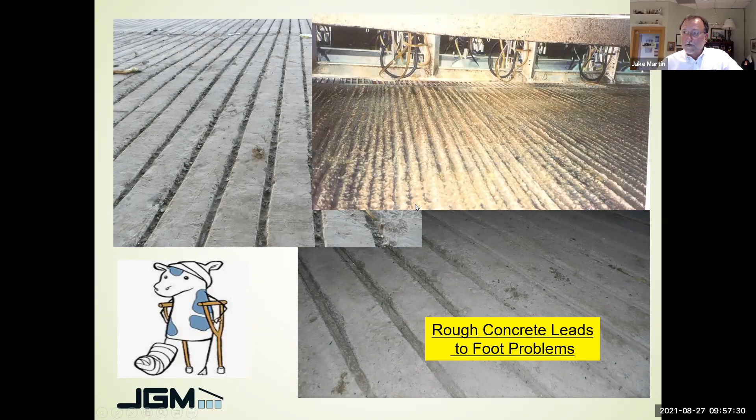But if you don't do this right, you can make a mess. And that's what these are right here. This is just unbelievable. These are tearing the feet off of cows. So it's a definite problem in some facilities, and you just got to be careful. You got to get the right contractor involved in order to do this right. All right, so that was 30 years of experience in 45 minutes.

Well, that's wonderful, Jake. Thank you very much for that. There's questions firing in left, right, and centre here.

But I guess my first question, we've got Dehne Vinnicombe on the line there, and one of the things that a lot of people will want to know is just that process, Dehne, like you've just been through it with Jake on that planning side, and from start to finish, a bit of a picture on what were the big eureka moments in that process.

Yeah, well, the reason we went down the path we went, we're Northern Victorian farmers, and our climate is changing. We had feed pads for cows. The wastage of feed that we're getting off these pads was just astronomical. I reckon we're losing about 25 to 30% of our feed. So that was a bit of a problem.

So we mucked around a little bit ourselves, seeing what we thought we could do, and then Jake was coming out, so we made contact with him and spoke to Quinton, and Quinton Moxey and his team of people have been really good to us. But the biggest thing there is we just thought, we were 450 cows, we were doing pretty well, and we only need to build one shed.